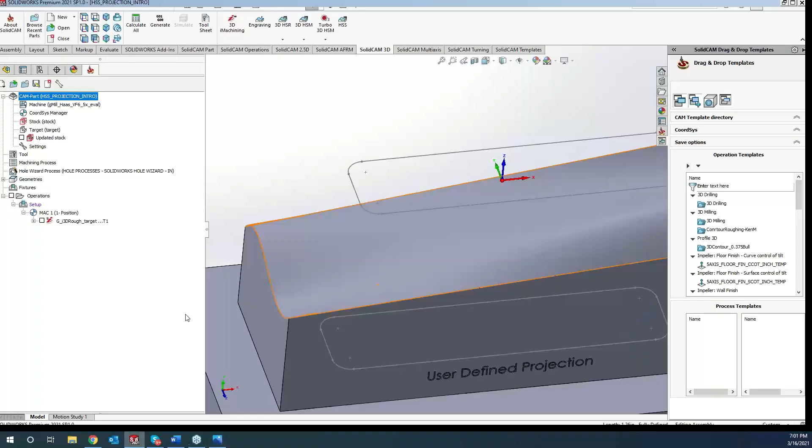With our HSS user-defined projection, first I got a part here, let me get this finished off since I just have a 3D rough. I'm going to do a quick linear cut, and my drive surface is the surface I want to cut. This may be a little repeat for some of you guys. We'll go ahead and use our ball end mill.

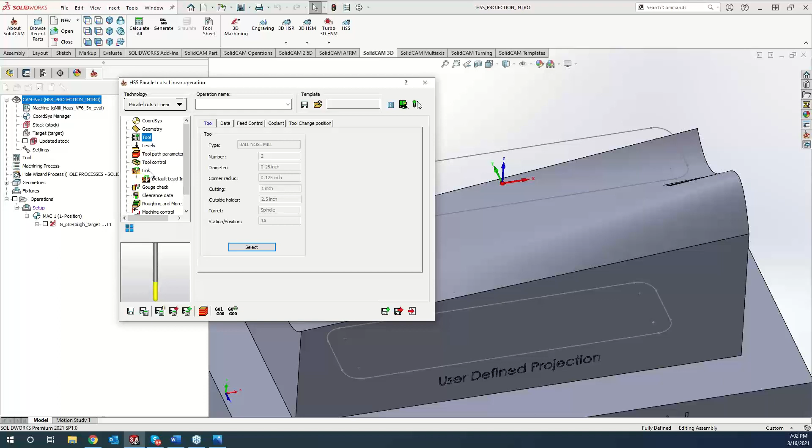Feels like it's been ages since we did the HSS linear class. Yeah, sure, so this will be a good refresher.

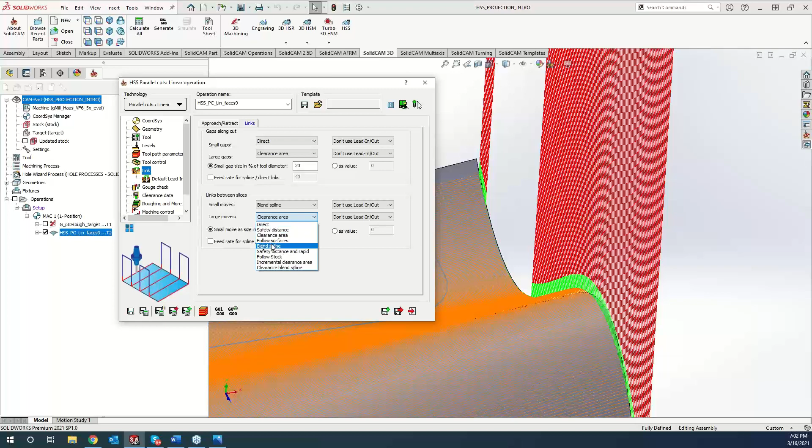All right, so we got a nice linear tool path on there. I got some jumping up and down on our ends, as well as square corners not blending real nice. So we're going to go to our links section, and I'm going to tell small moves to do a blend spline, as well as large moves or links between slices, to clean up our tool path. All right, we're good.

So now we are up to a surface finish stage right here. Now if we wanted to cut an O-ring groove in here, or use a part number, or do any kind of engraving, this is where HSS projection really shines. For those of you who remember, we're going way back to when we talked about 3D engraving. This is pretty much the same thing—HSS projection is 3D engraving, because what you're doing is clicking on a sketch, and it projects it down onto the surface and follows the contour of that surface.

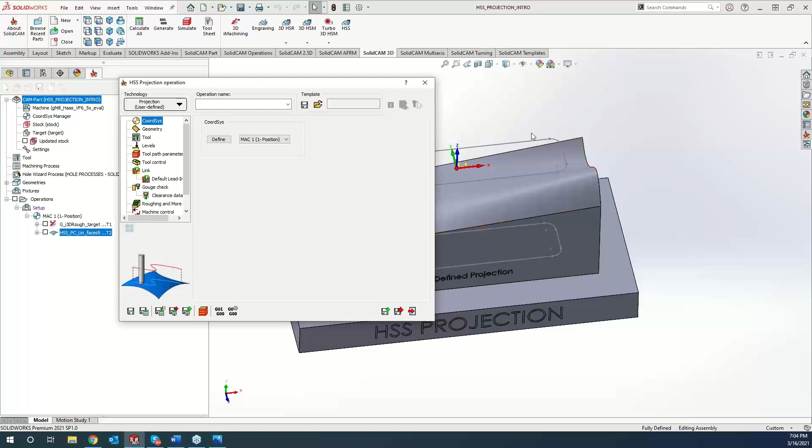Let's go ahead and open up our HSS here, you'll find it at the very bottom, and we're going to do user defined. Now I should explain what user defined is. The strategy projects the curve selected in the projection curve selection down onto the drive surface. So in machinist terms, we're going to take this sketch and project it right onto a 3D contoured surface.

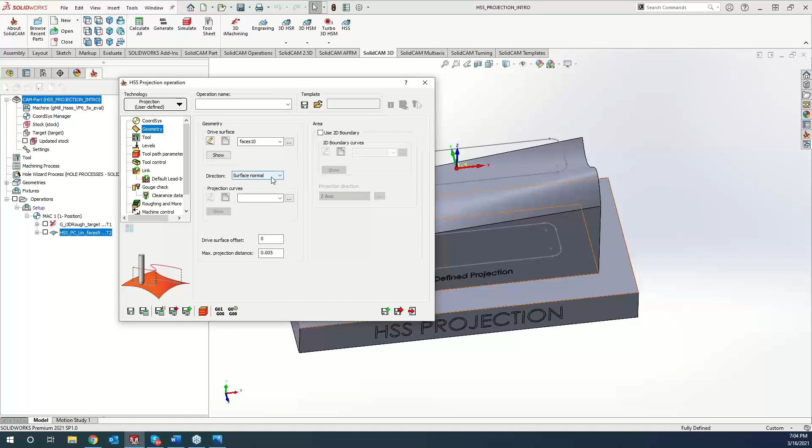So drive surface—what do we want it projected onto? We want to project that sketch onto that surface. For this particular one, we are going to do the direction in the z-axis. Now the curve is what you want the end mill to follow, so we're going to tell it to follow that sketch.

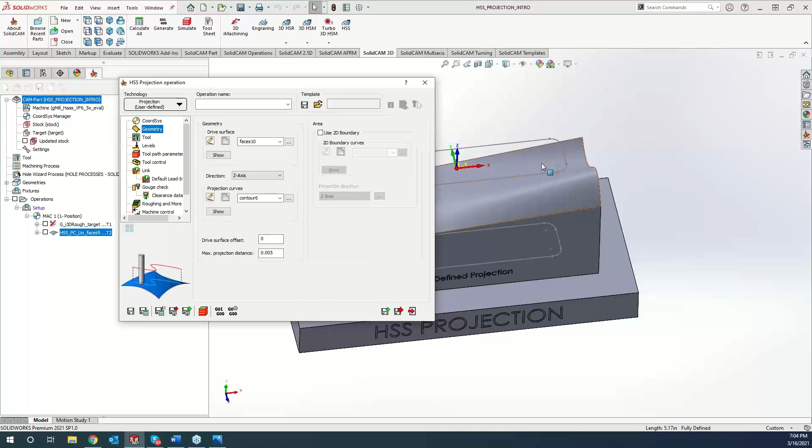Since what it will be doing is projecting, a ball end mill going right along the sketch line. Now if we're doing an O-ring groove or something like that, we're probably going to want to go just a little bit deeper. So with my surface offset here, I'm going to tell it we want to go -5, so that ball end mill is going to be going into the material by 5 thou.

Now grab a tool. Like I said, kind of think of this as almost like pencil milling, just following one pass. I'll show you some cleanup passes on the next part here. And that is it.

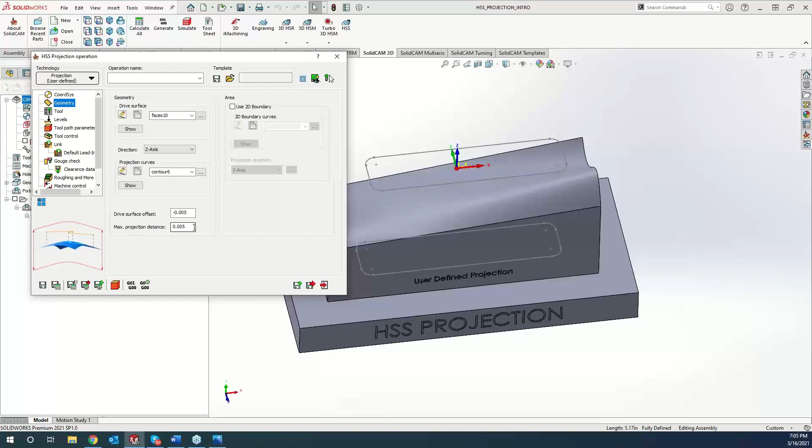Just to recap here: drive surface is the surface that we want to project it onto. The projection curve is the sketch that we want to use for the projection. The max projection distance is the distance—if you had multiple layers of different sketches, you could filter out some of those sketch lines based on the max projection distance. Since this projection is within 5 thou of the max distance, it's going to throw it on there. If we had more up on top, it would filter those out for you guys. Then grabbing our tool, and that is it.

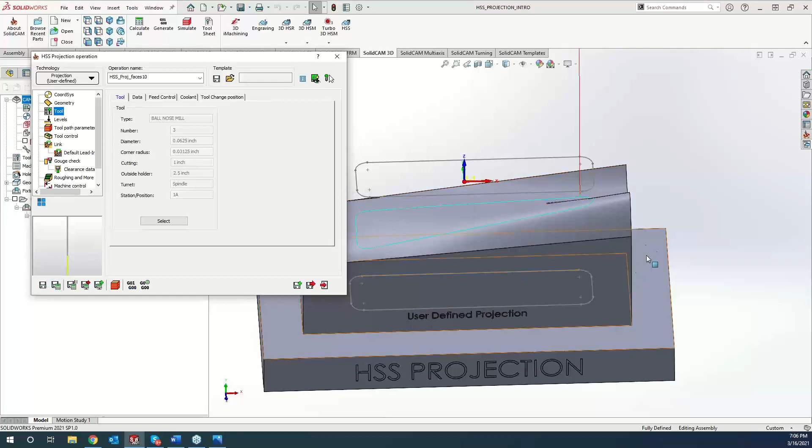Save and calculate, and we get kind of a top-down or isometric view here. You can see the tool path is following along the curvature of the surface to a T. So let's go ahead and simulate this here—take a second to update because I created that linear path.

I must have my tolerance set pretty tight because it's taking a little bit here.

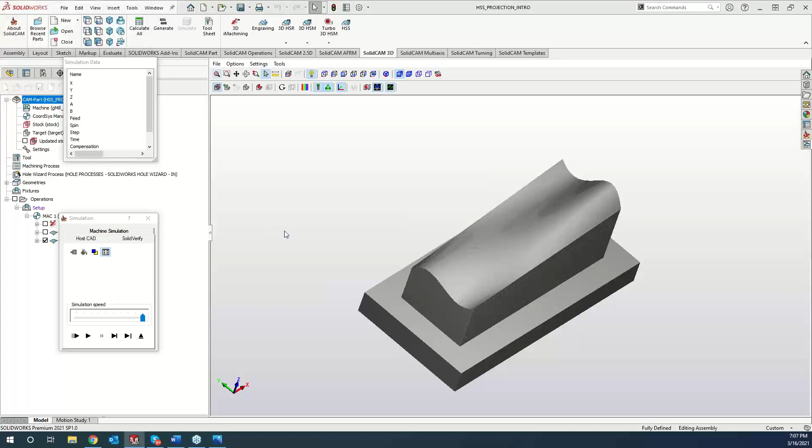All right, so here's what it looks like after my linear HSS linear path went through there. Now, if I could slow this down a little bit, we can watch our tool make, like I said, an O-ring groove. If you want to do some kind of tracing, anything like that, is really where projection comes in handy, just doing one single line.

Now, normally if we were to do this, what we need to do is model it up in SolidWorks and get that O-ring groove in there. So this is eliminating all that work of having to do a cut sweep, following the curvature and all that, and you can do it right inside the software. So like I said, all you just need is that simple sketch, and it will project it on there automatically for you guys.

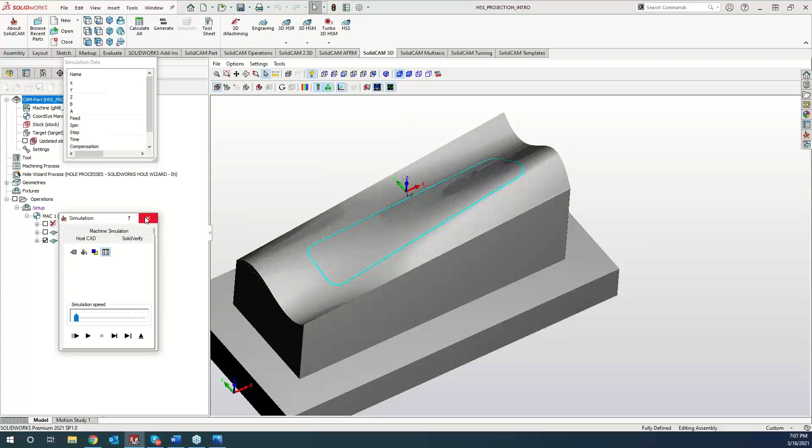Any questions on this part? Or Greg, do you got something that we could go over? No, I may have something towards the end, but so far so good, and no questions coming from the questions panel.

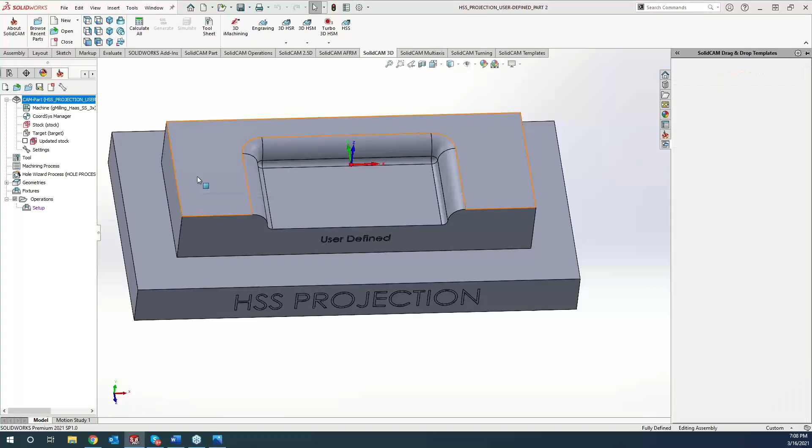All right, so this is kind of where I was talking about cleaning up corners, or almost like a single line pencil path just to clean up. So on this one, we want to just clean up the bottom radius along here.

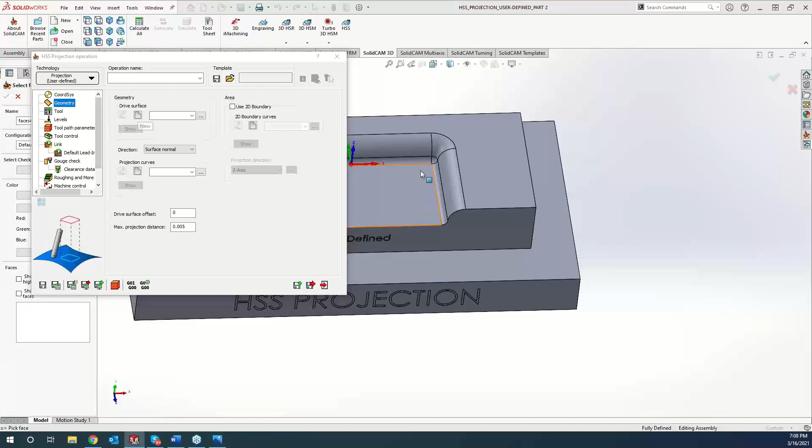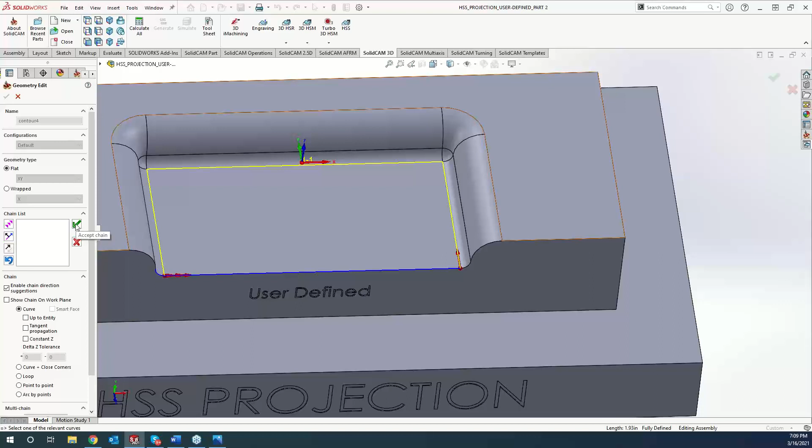So once again, we are going to do our HSS projection user defined. My geometry is going to be my chamfer going around here, or radius. And then my projected curve is going to be following along this bottom half right here. So that's kind of my guide curve, or that's the way I want the toolpath to follow.

All right, and then I'm trying to think. Nope, I think this is good. And now this is basically a 2D part, so it's not really doing any up and down movement, just kind of cleaning up that last fillet along there.

Grab our end mill, and we'll go ahead and save and calculate here. Let's go ahead and simulate this.

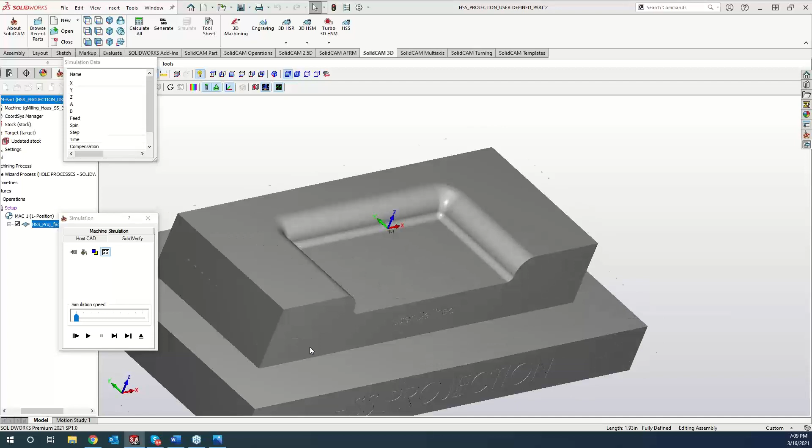And our tool just does a simple, easy move, cleaning out those areas for us. And if we go ahead and turn our stock target comparison on, we can see that we're right up to size, cleaning out that material that was previously left over from a previous operation. So keep that in mind when you guys are doing this.

Like I said, projection user defined is not one that I use a whole lot. But as I was kind of going through the class material, it's like, oh man, I could have used it on this part here and saved myself a little bit of time. So definitely keep that in the back of your mind too.

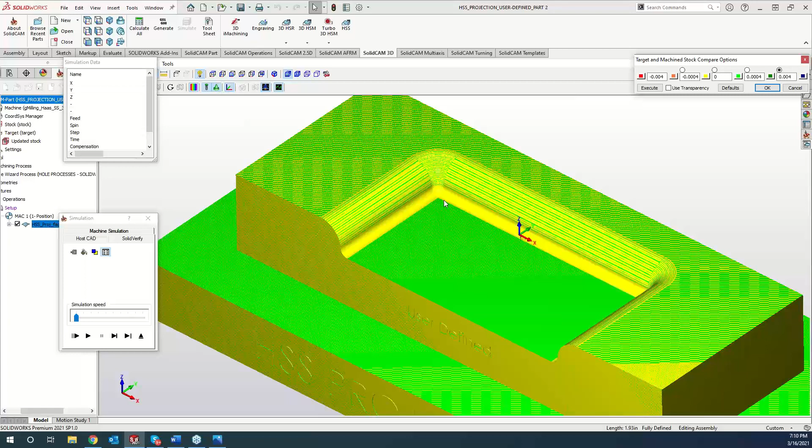All right, so now let's take this same part and do 3D motion here. So let's go here.

So we got a little bit of a smaller radius with not so nice of a blend into a larger radius, as well as a smaller radius over here. So same thing as what we talked about before.

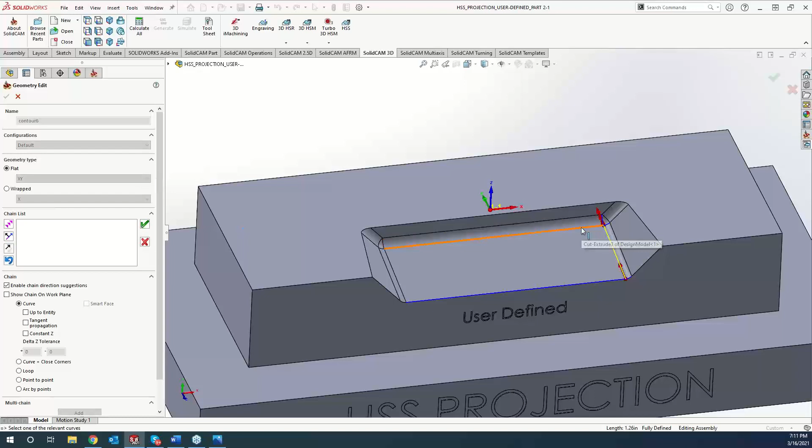Is our geometry will be the fillet here, the curve that I want it to follow, and then just our tool.

And you can see we got exactly following along there. Now, remember the tool path that is being shown is the center of the ball coming along here. So when we come straight down and start feeding down for this last little bit, we might be hitting material.

So at this point, something we don't talk about a whole lot with HSS, but having your lead in and lead out. So we can set up a lead in, lead out.

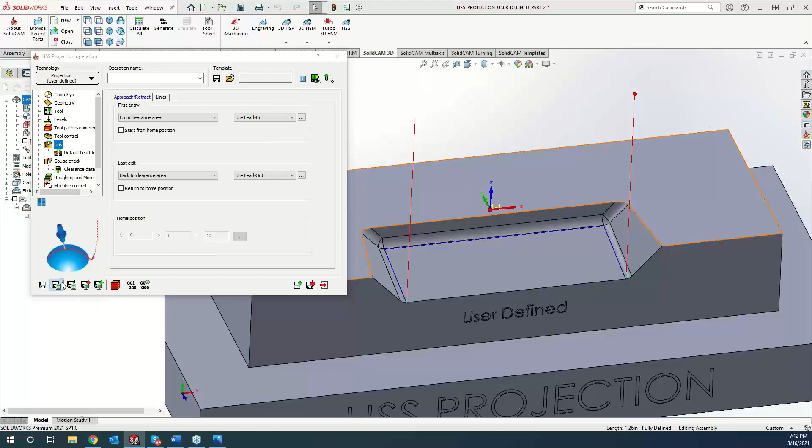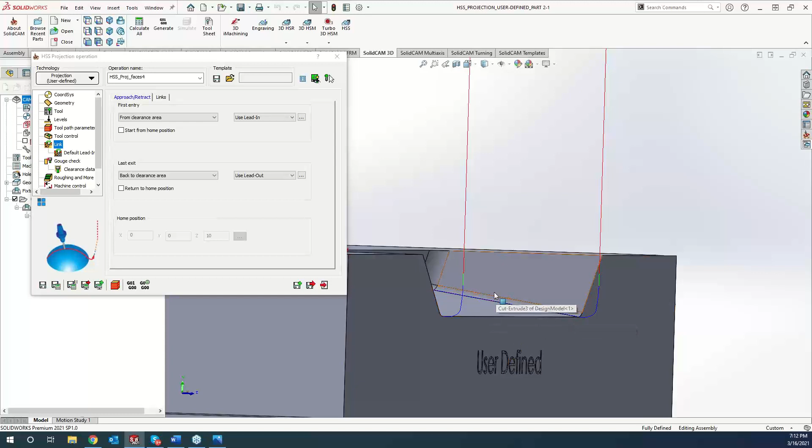And now you can see that we're kind of getting a little side shot here. We're coming in from the side, doing a vertical tangent arc as we arc into the material and start moving across. And hopefully you guys can see that we're not doing a 2D surface here, we're actually doing 3D, so all X, Y, and Z axes will be going simultaneously through there to get that cut.

So like I said, it's not something that gets used a whole lot, but definitely hope this kind of helps shed some light for everyone as well.

Okay, Greg, what you got?

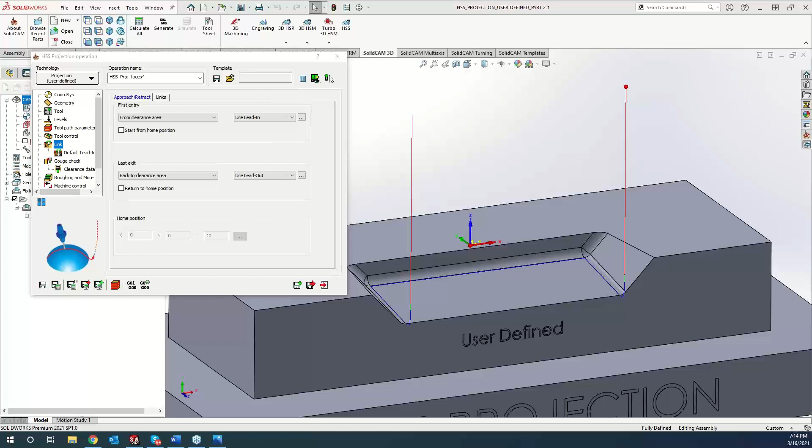Wanted to bring up that the HSS user-defined projection can be used in some cases as a manual toolpath of sorts. As we saw with the first example where we're driving it along a SolidWorks sketch, you don't have to actually project that to a surface feature on a model. You can use SolidWorks surfaces based off that sketch and drive the toolpath along a desired sketch line, regardless of the surfaces around it. I've seen some creative uses of this, especially with the counterpart in simultaneous 5-axis, using the HSS user-defined projection but with rotary motion involved. There's a lot of interesting things you can do with this type of toolpath that wouldn't be possible with other style toolpaths.

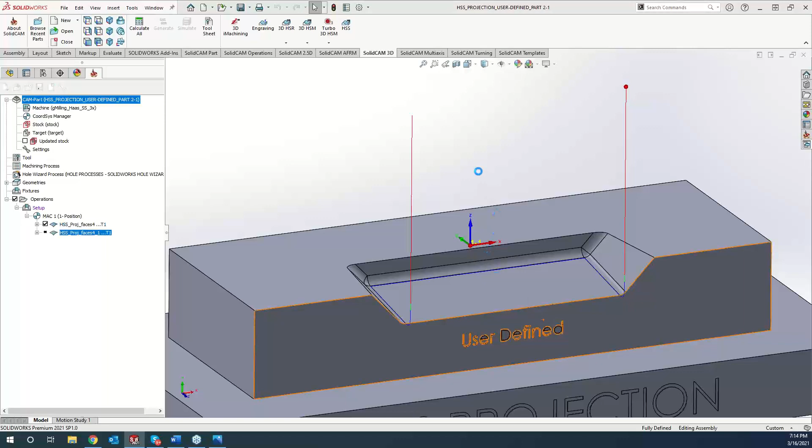Even on a part like this, if we came in here and cleaned up this radius, and we want to come in here and do this radius following along here, we could also do that. Let's throw some path on that real quick, and our curve. There we go. So we can see that ball end mill kind of curving down and working its way through, getting that cut out of there and coming back through. So smaller radiuses definitely help as well, it'll help you guys out in there.

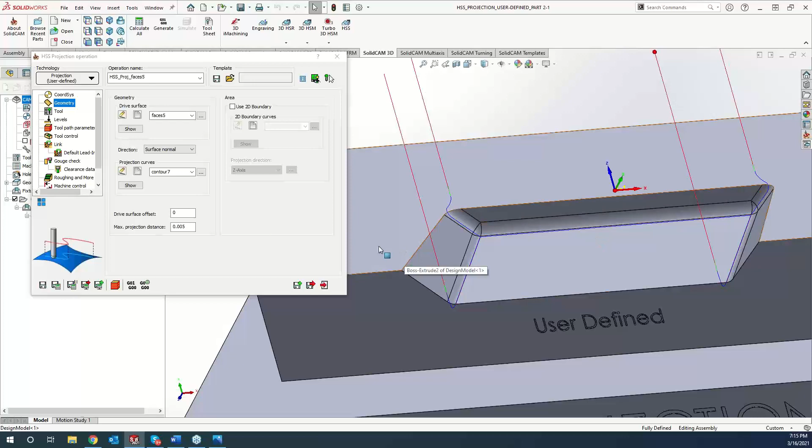Kind of wish I had more to show you guys, but I think that's everything that I planned for tonight. It's going to take a little bit longer than 15 minutes.

You were bringing up earlier about the differences between a 3D engraving and a user-defined projection. Maybe we can touch on some of those since they share some overlap. Let's go back to that part here.

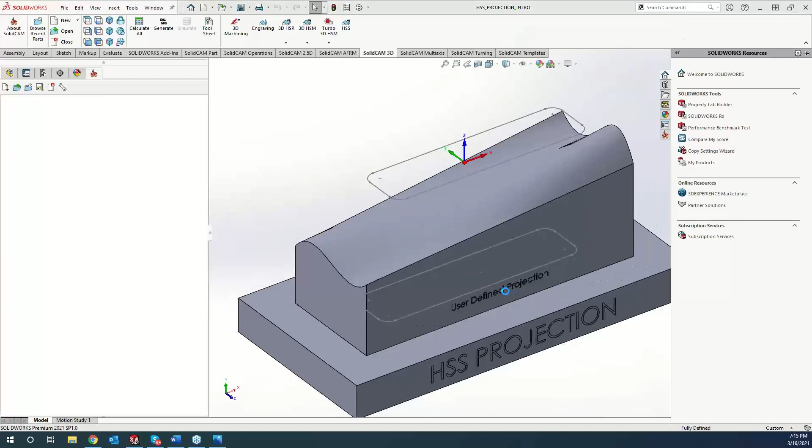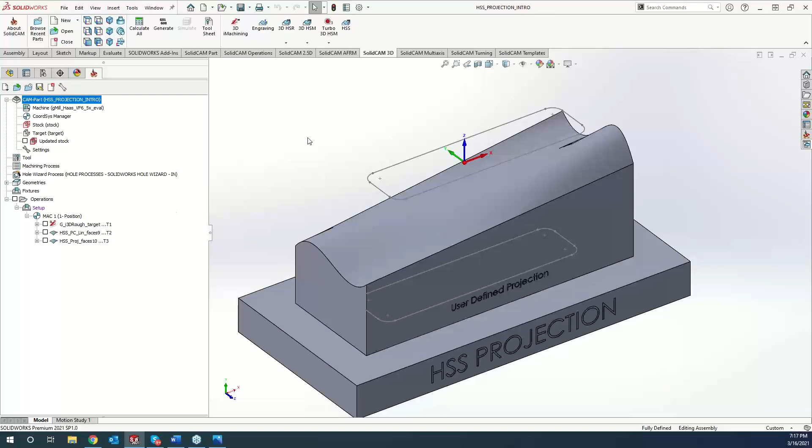Now, completely off subject, has nothing to do with HSS or not, but I'm going to bring this up because I'm fighting it right now as I'm doing the night class. Greg's like, oh boy, what's going on here? I'm going to show you guys something that Greg got me stuck on, and I was for sure not going to ever get one. But for those of you that use a mouse, which pretty much everybody does, this mouse, I don't even know what they sell for. What do they go for, like $100, 119 bucks, worth every single penny. The reason I say that is I'm bouncing between two computers, this computer I don't have it, the other computer I do, and they got it set up for right hand, left hand. This is no sponsor or anything like that. If you guys are doing a lot of modeling, doing a lot of CAM, this will make your life a whole lot easier. All right, we'll get back to the topic. Yeah, I absolutely love mine for all the traveling that I do. And the way you can select between USB mode and Bluetooth mode works quite nicely.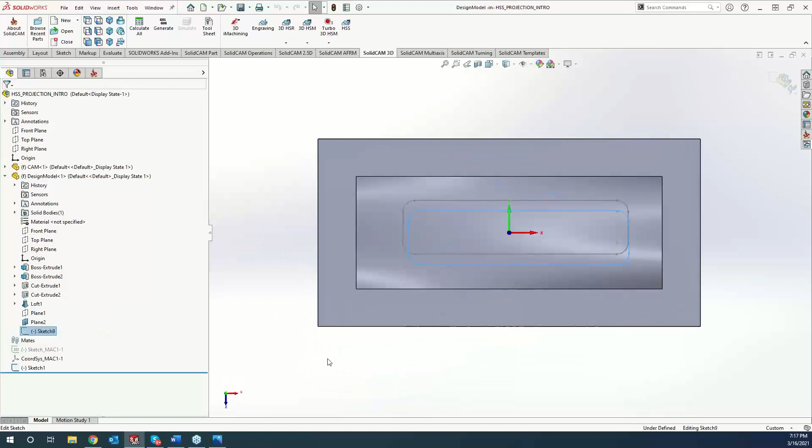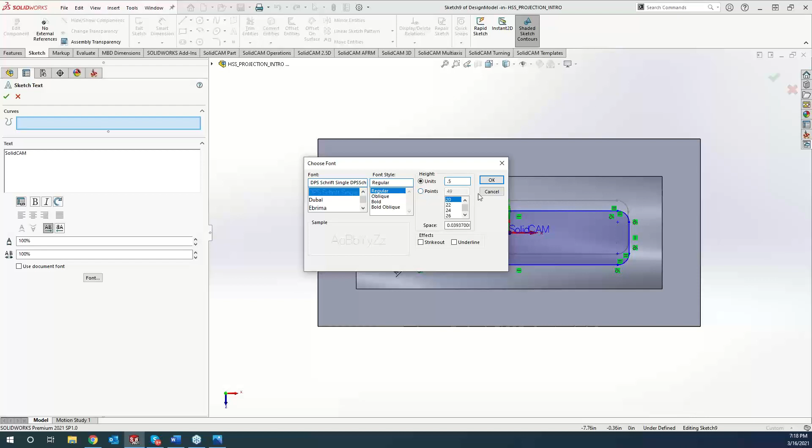All right, so let's go to that sketch. So we got a sketch on there. Let's go ahead and add, and let's go font. Now, for those of you that do engraving or any kind of lettering and stuff, DPS Schrift is your go-to, it does a really nice single line font. No, that's gotta get bigger than that. And that's not gonna let me, oh, we'll keep it right there for right now. We don't have to put another sketch on there.

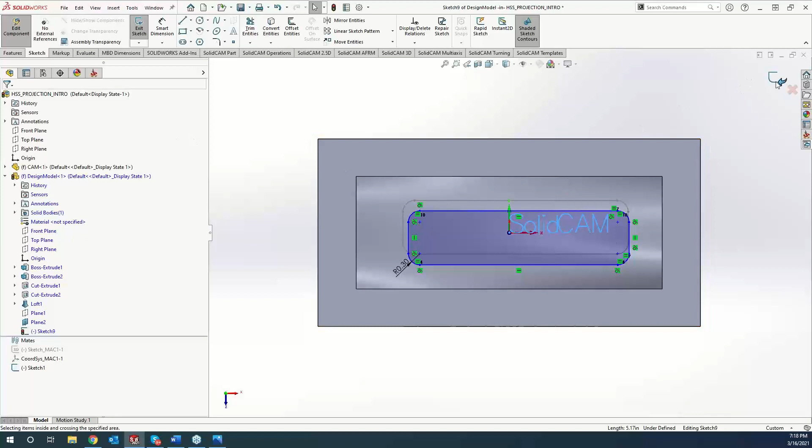All right, so kind of the differences between the two. I do see we got a question asking if we can offset it, and absolutely. So we can see that our sketch is not even close to our surface there. I don't have to do any work inside SolidWorks. To get with Brock's question here, let me get to our HSS projection. So if you want to offset it 10 thou, 5 thou, whatever you're looking for. Right now we're currently telling it to do a negative offset of -5. But if we want to go something larger, like 15 thou, which is going to be a gouge into your model, if you're using gouge check, it's not going to work out so well, because if you do a gouge check against the drive, we're trying to drive that tool through there.

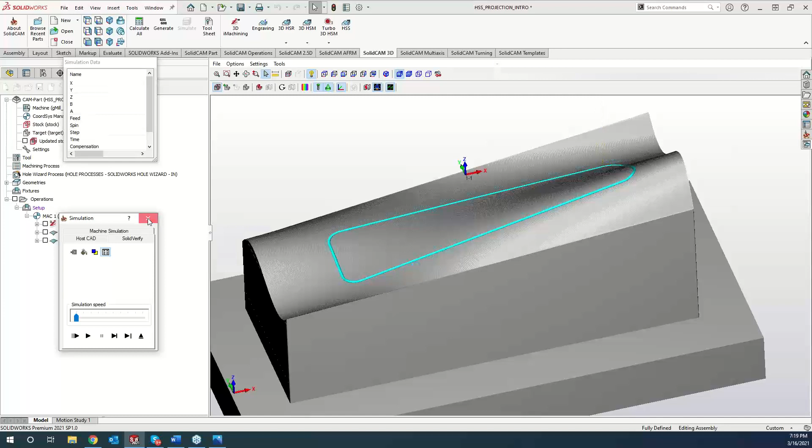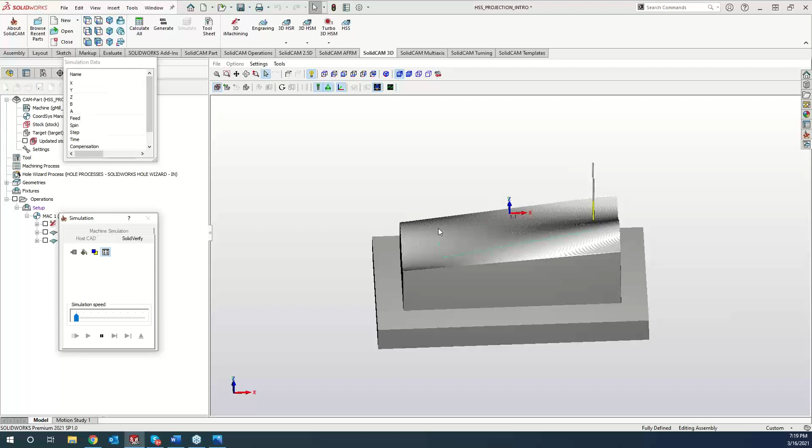So now let's go ahead and just do a quick simulate here. And we can see that tool is going, well, not way in there, but deeper than the 5 thou that was before. Now if you're just looking to, like we're talking on the other parts, do a kind of cleanup pass, put 0 in there, SolidVerify, and we'll still see a little bit of remnants there, just because our linear pass was going this way, especially when we're changing orientation with that tool, so you'll see a little bit of marking on there, but you can see it's just going along right along that drive surface and cutting in there.

So we were talking about 3D engraving. Now basically the exact same thing, so we'll do a comparison here. So let's do 3D engraving, switch it over to 3D. It's asking me for the text, so I'm gonna go to my multi-chain text, grab my SolidCAM, accept that.

And we'll just use that same tool, which was tool 3. For levels, the upper level, top of the part, we could just put 0. Lower level, that's fine. My engraving depth, I want to be 5 thou.

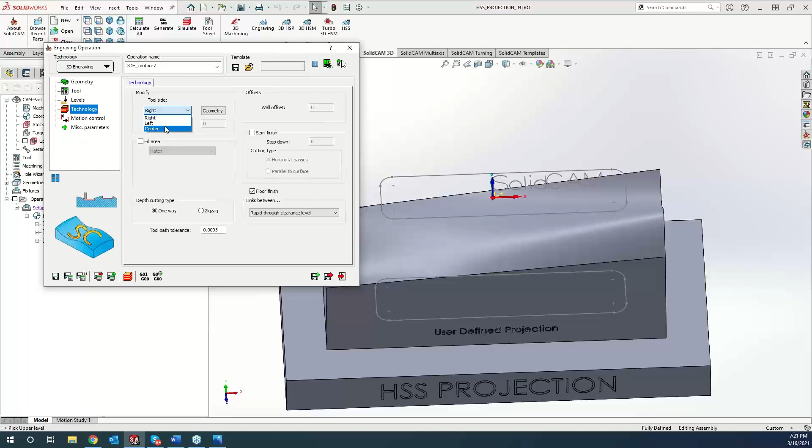Technology, I want the tool to follow the center. Save and calculate. And let's go ahead and see what that looks like.

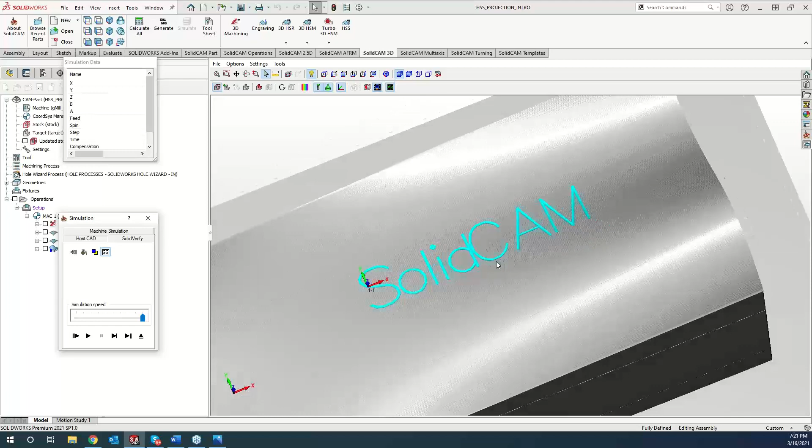Speed it up here. So you get a nice, clean SolidCAM cut going through there. I could have spaced out my letters a little bit more here, but it gives you guys a good example.

Now HSS should be the exact same thing. So, user defined, drive surface.

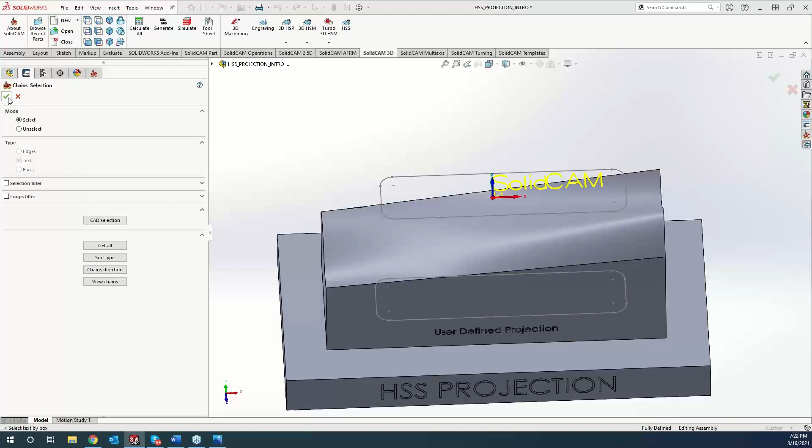What do we want to project? That same text as we grabbed before. So we're going to do add multi-chain text. Go ahead and hit the green check mark.

And drive surface offset, do minus 0.010 thou on this one. Save and calculate.

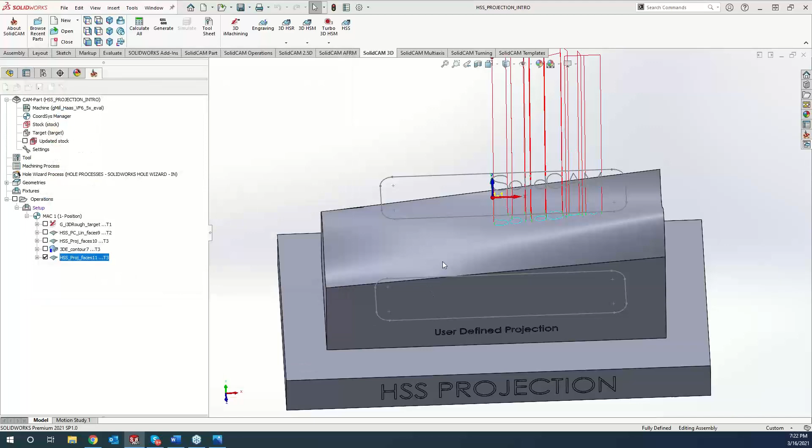So we can see the SolidCAM from our previous 3D engraving. Now this one should be going a little bit deeper, but it's the exact same thing.

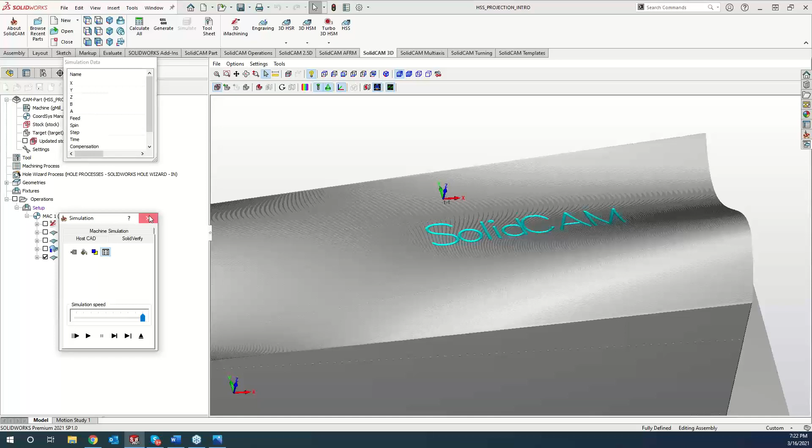If you guys are looking to do any kind of engraving, like I said, you can put it on the craziest surface and it's going to follow it right to a T. And kind of getting with Brock's question, I can go to my geometry, I can put it at a +1 inch, I can tell it to go way down deep inside there. The sky's the limit on what you guys can do.

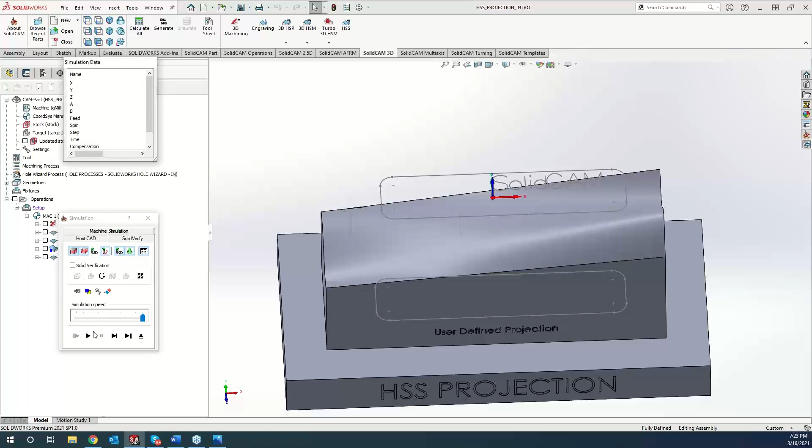So if we do like a -0.1, I don't recommend because it may break your ball end mill. You can see we're going much deeper in there if you're looking for a little bit heavier cut.

So, any questions from anybody? Oh, go ahead.

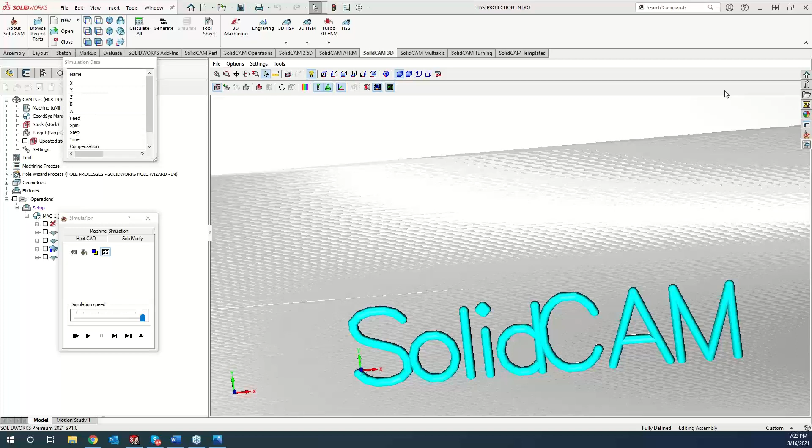Well, one of the things you're going to see between the two, the 3D engraving and the HSS user-defined projection, is that you have a lot more options when it comes to the HSS operation. We didn't really touch upon it with these parts, but gouge checking. You mentioned gouge checking against the drive surface. You're not going to get any toolpath. But if you are going to put any kind of texturing on a part that has an organic surface...

Say you want to put some checkering on something, you can use the HSS user defined, and you can also use the 3D engraving. But if you find that you have like an extruded boss coming up through that surface, you can actually use the surfaces of that extruded boss in your gouge check on the HSS variant, and that way the toolpath will automatically either retract the tool and go around that boss and back into the material, or you can set up a variety of different options within your gouge check, but you don't have to make any special provisions for that geometry that you normally would if you were using 3D engraving.

Yeah, great point. And on top of that, if you guys have a toe clamp or part of your fixture in the way, or a bolt that's in the way, you can use that as your check surface as well to avoid that too. So yeah, didn't even think about that one.

Any other questions from anybody out there? Well, I had one come through, so it's a pretty easy night. And we verified that the question system works. Yeah, exactly.